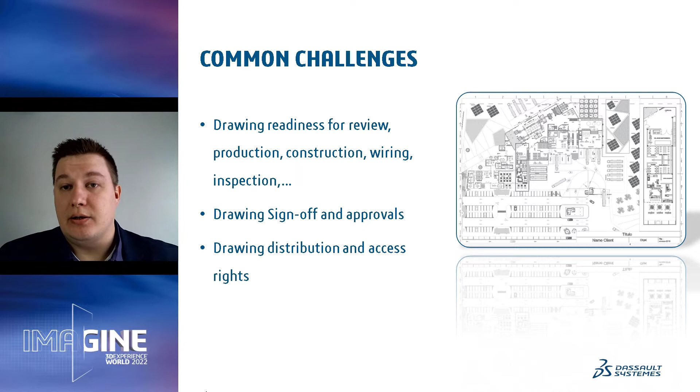And when we especially talk about large projects, think about something like an airport, a hospital, the volume of drawings that can be created for that one building number in the thousands, if not hundreds of thousands. And it's a challenge to be able to manage that kind of volume of data. And it's not just the drawings, there's so many additional documents that come into play when we talk about these large projects. Thinking about some of these myths and common challenges, how does 3D Experience DraftSight provide a solution?

Well, it all starts with the 3D Experience platform, which connects people, data, and ideas in a single collaborative ecosystem. Now, collaboration does come in many different forms. There's unstructured collaboration. For example, when we just communicate via instant message and email, but we're still collaborating with our colleagues, our teams, other stakeholders throughout the entire project process. And then we look at structured collaboration, where we use a formalized system, whether it's something as simple as Excel or a full-scale project development and management application, to track all of the different tasks, all of the different milestones associated with a project from start to finish.

Now, the beauty of the 3D Experience platform is that we get all of the different capability to do both unstructured as well as structured collaboration in a single unified environment. And there are a lot of different apps on the platform that allow you to do that collaboration, to work through that process, to communicate with others. There's dashboards, there's communities, there's file sharing, there's project planning, there's full data management, as well as things like tracking individual team members' tasks, issues, change actions. And we're going to see all of that in just a minute.

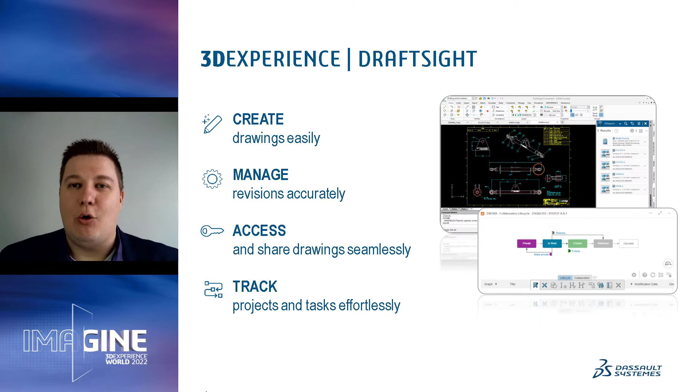Jumping into DraftSight, we're in DraftSight 2022, the 3D Experience DraftSight Premium, also called DraftSight Connected. It's the exact same DraftSight you'd get on the desktop, except this is the 3D Experience version. On the right side, we have a new task pane that connects us directly to the 3D Experience platform from inside DraftSight. Let's work through a few simple use cases on how we can manage our data and tasks related to the projects we're working on, directly inside DraftSight.

To start, I'm going to open up a drawing that I have saved locally on my PC. All right, and that's open. We have, I would say, a very typical drawing, just a floor plan of a single-family home.

The drawing is ready, and as soon as we have it open, we can see that inside the 3D Experience task pane, the drawing is recognized, and we can also see the status. This indicates that this particular drawing is not yet stored in our data management system and is not yet stored in the 3D Experience platform. So the first step is we'd like to save it up into the cloud. Thinking back to our myths, how do we move data from desktop to cloud?

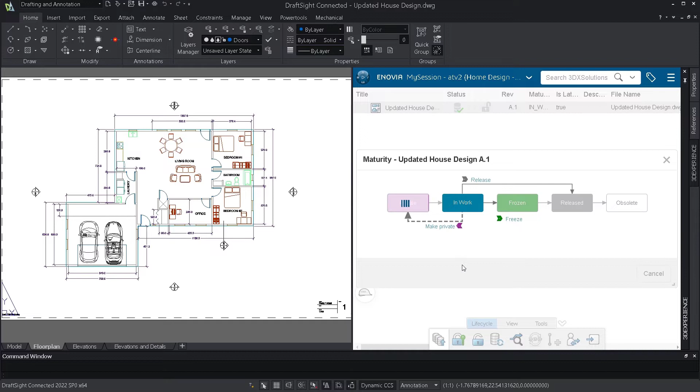So I can make the drawing private. The maturity state is updated, so anyone else who has access to this drawing or who's working on my team in the same collaborative space can no longer access it since it's private to me. Or I can go ahead and release it.

So I'll put it back into the in-work state, since we do go through a process as far as the transitions are concerned, and then we'll release this drawing. So the drawing is now released, it's unlocked, and it's synced to the 3D Experience platform.

Now, I am working through the right click, that's a personal preference. You also have access to all of those same commands here in the toolbar at the bottom. So you have your life cycle, viewing functions, as well as some additional tools like tracking the relations if you had a drawing with relations to other drawings, things like that.

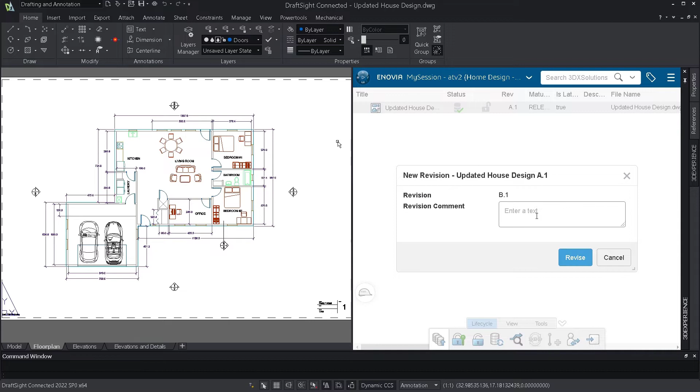Additionally, through this task pane, I can create a new revision. Let's say I've released this drawing, but now I want to make a change to it, or perhaps reuse this drawing for another client. So I can create a new revision. By default, because the first revision is A.1, the new revision is B.1. If I want to enter a comment, I can. And now the new revision has been created.

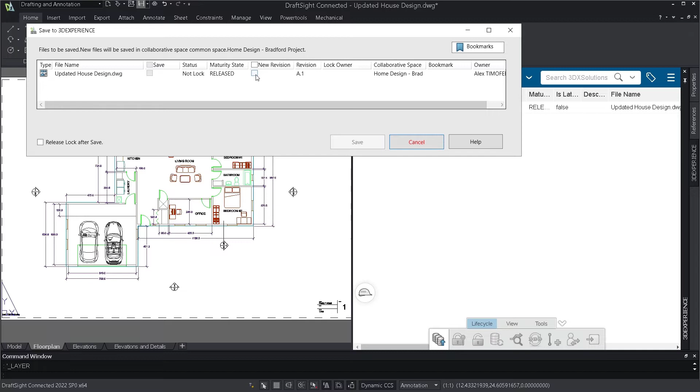Now, I am still working in A.1, as that's the drawing I currently have open inside DraftSight. But as I make changes to it, let's do something very simple like changing the line color of the doors. Very simple change. We'll save it. And as soon as I click save, because this particular drawing is released, making any changes to it requires creating a new revision.

When I do that, it automatically uploads that new revision directly into the 3D Experience platform, and now that revision is C.1. When it uploads, by default it's locked, but I can unlock it so it's available to everyone else. For now, I'll leave this in the in-work state.

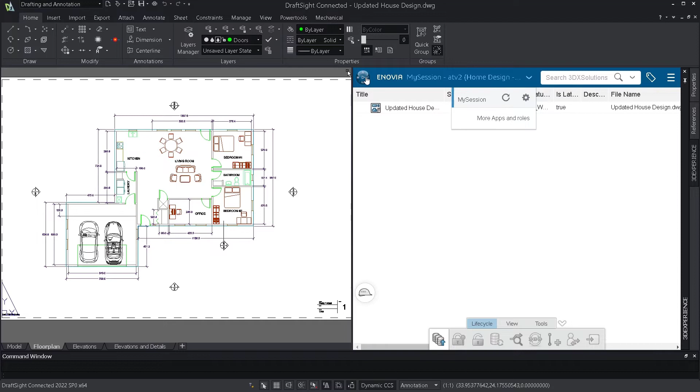One other very powerful tool I can use directly inside the task pane for the 3D Experience platform is tracking tasks, going more into the project management capabilities. I'll open my Compass and open one of my favorite apps, the Collaborative Tasks app. Here I can see all of the tasks I've created or that are assigned to me, and what state they're in, whether to-do, in work, or already complete.

Now I see there's a new task I have to take care of for another project. In this case, I have to add dimensions. First, I can review the task by clicking on it and see all the details. A drawing is missing a few exterior wall dimensions, so we can easily add those. I will update this to in work.

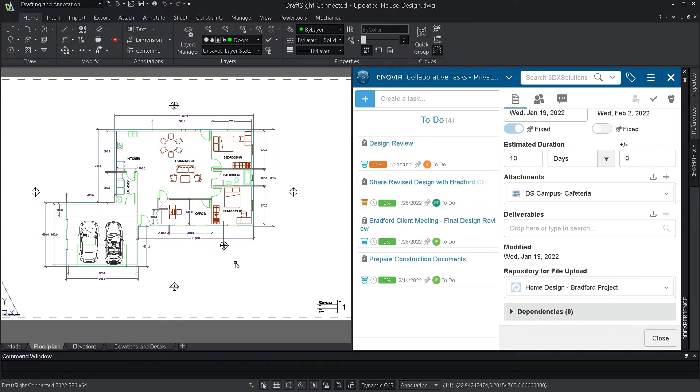I can also see that there's an attachment, the drawing I need to add dimensions to, so we can go ahead and open that directly inside of DraftSight. As soon as I use that open-with, the drawing is automatically going to get downloaded from the 3D Experience platform and open up inside the DraftSight interface.

All right, here we are. So we have the cafeteria drawing for another project, and looking at this specific sheet, I can see that there are actually some dimensions missing. So we can quickly fix that if we jump over into the model space.

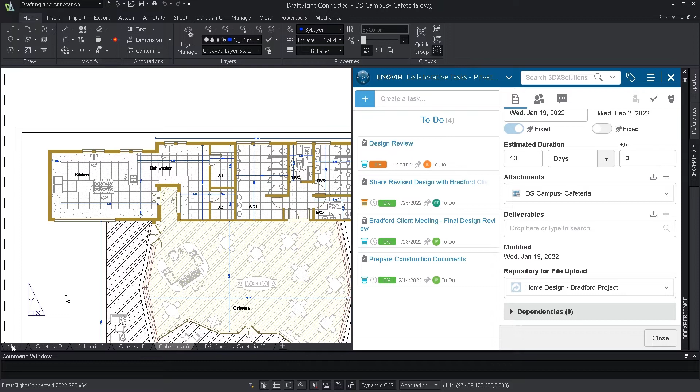Let's use one of the features in DraftSight, in this case Smart Dimensions. So click here, add that dimension. We'll add a dimension for this other wall on the side here. And I think there was one more dimension missing. Here we go, let's grab the entire length of this wall.

Perfect, so I will save the drawing. It's in work, so I can overwrite it, or I can create a new revision. I will just simply create a new revision.

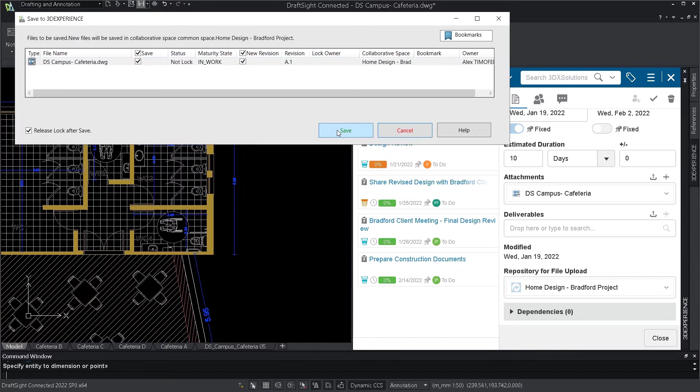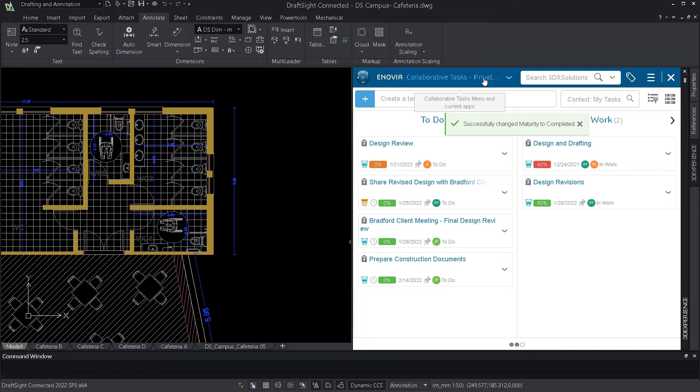So the task is complete, the drawing has been uploaded, the new version with the correct dimensions has been uploaded. So I will mark this task as complete. The task has been changed, and I can go back to my session and see that I'm working with that new revision I created, B1.

We can call that a very productive day. In just a few clicks, I'm able to do everything I'd love to do inside of DraftSight as far as designing and editing my drawings. Beyond that, I have a lot of additional capabilities with the 3D Experience platform to manage my data, create new revisions, manage the project and the tasks associated with it, all inside of the 3D Experience platform as well as inside of DraftSight. So I have all of these capabilities for data and project management in the cloud as well.

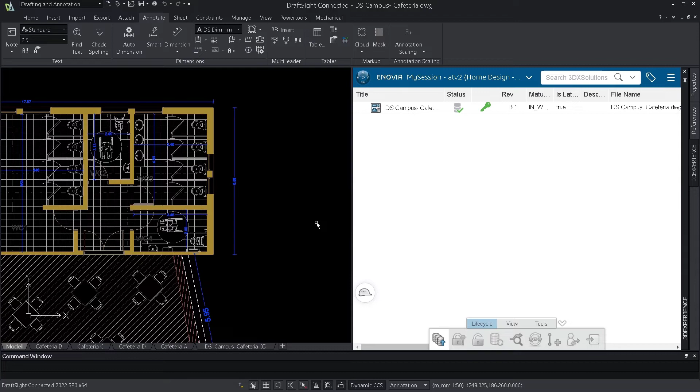Let's switch over to my browser and take a look. Here I'm in the 3D Experience platform inside my browser. I can see all of my project files, including the two I was just working on, the floor plan for the house, as well as the cafeteria drawing that I just updated to add those dimensions. As I mentioned, you can do everything inside of DraftSight, inside of that task pane, and you can do all of that in the browser as well.

So let's take a look at the maturity state of these drawings. I can expand my dashboard, and I'll add the collaborative lifecycle app with a simple drag and drop, and we'll take one of the drawings that I was working on.

And I can see when it was released, when it was created, when it was last modified, and all of the revisions associated with it, as well as their states.

In addition to that, I have the same ability to change the life cycle. For example, with this drawing, let's say I want to freeze revision B.1. Clicking freeze will automatically update the drawing.

That's always reflected inside of DraftSight as well, so it's always a real-time data connection between the work that you do in the cloud and the work that you do inside of the desktop application, which makes it much easier to manage our data and stay connected and in sync throughout the entire project process.

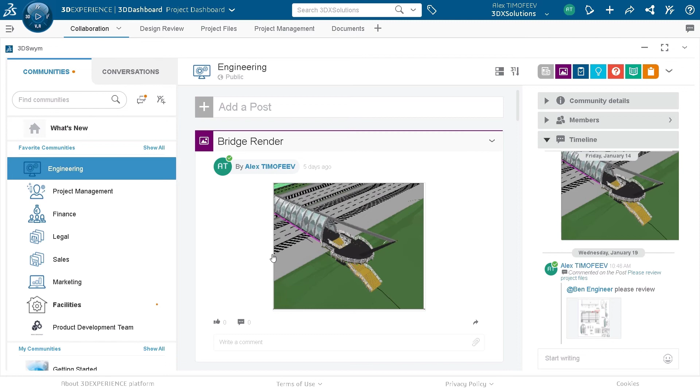So here I can see a timeline view for any community. I have one for my design team called engineering, and I can see any updates happening to that community. For one of the projects that we have, a render has been uploaded. There are various project files. We can even create annotations on various drawings and review.

So in this case, this drawing has a 40mm steel tube handrail, and we would like the design team to update it to a 30mm handrail. So all of that is possible, that collaboration process, all inside of one community, and everyone has visibility with the right permissions.

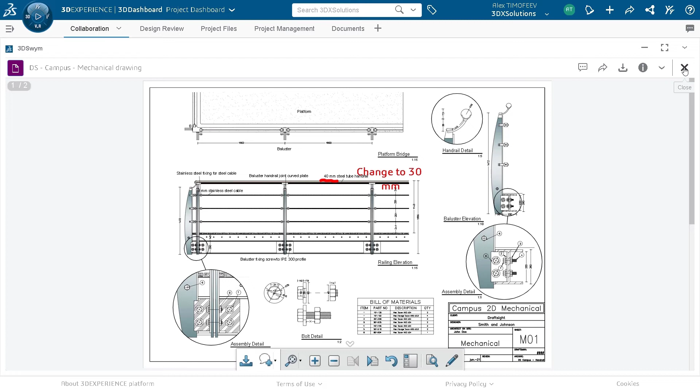Now, this isn't limited to just engineering. We've talked about CAD for quite a bit. This can be used for the project management team to request status updates and track what's happening with the project. This can be used by the finance team to track the expenses related to the project, to the fiscal year.

This can be used by legal to track any agreements and share and upload documentation, by the sales department to track forecasts and their deals, whether in progress or just starting work on a new opportunity, as well as by marketing, to share design concepts and images for promotional materials.

The facilities team, product development, and anyone else in the organization can use the 3D Experience platform as a single source of truth to collaborate and innovate together.

So let's jump back to the presentation to wrap up with a few brief slides.

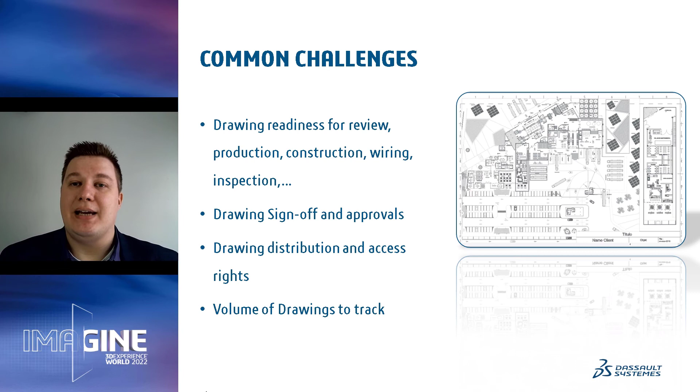We've just walked through how the 3D Experience platform combined with DraftSight allows you to address all the myths mentioned at the beginning, as well as work through the common challenges we see, looking at approvals and how we can create revisions for drawings, release them, freeze them, make them private so we have full control of the maturity, how we can share throughout the communities for each of the functions or projects we're working on, and how we can make sure the right people have access to the right content at any given time.

To summarize, we start with drawing data management, which gives you confidence and ensures your mission critical project drawings are never lost because they're all stored securely in the cloud and accessible at any time. Everyone has access to the right content, so you don't have to worry about chasing down emails or revisions. Everyone knows what they're working on, and everyone can see the revision history for any given drawing. Everything is tracked and managed, and it's always a single source of truth.

The other thing we looked at is project management, where you're able to, as part of the 3D Experience platform, work with apps such as Project Planner to completely execute your project from start to finish, making sure everyone has visibility, everyone is working transparently, and everything is completed on time.

With the 3D Experience platform as a whole, we've seen how we can manage not just our drawings and CAD data, but all of the documentation, the PDFs, the images, the vendor agreements, the construction paperwork, all in a single place throughout the entire project process.

We're able to connect all of the stakeholders, so we're always working on one data set, and everyone has full confidence and full access to know what's happening with the project at any given time.